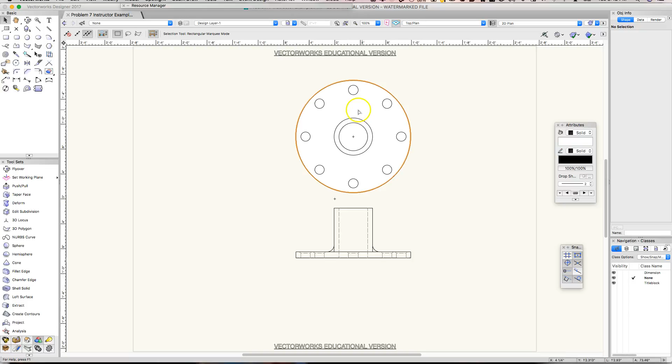You might need to make a couple adjustments, you might need to redraft it. I'll leave that up to you, but right now it is in the proper size. The only thing that's missing is that circle right about here, and all it is, is the 2D representation of the fillet that we're going to put down.

So let's get going. The first thing we need to do is make the base, and that's an inch. So we're going to come over to Model, and we're going to Extrude, and we're going to set that to 1 inch.

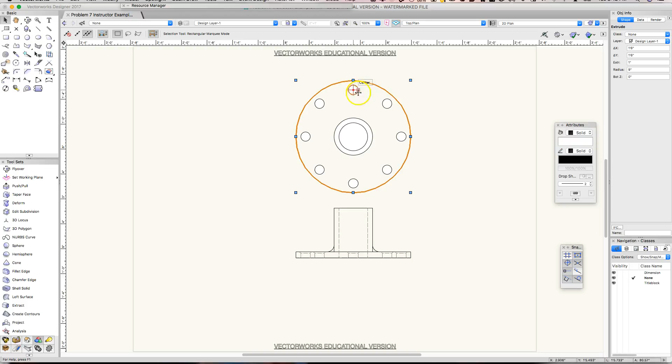The next thing we're going to do is extrude and subtract all of these circles at the same time. So I'm going to select them all, we're going to extrude them, Model Extrude, and now we'll make them 3 inches.

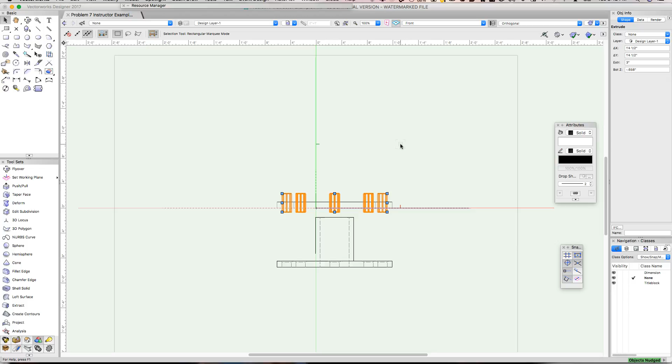Come over to front view, and we just need to scoot them down just a little bit. And then I'm going to hold down my shift key and select the base. We're going to model, subtract solids - we want to subtract them from the red, the base. There's our drill holes, our bolt holes, taken out.

So let's come to isometric. And the one thing we have to do now - let's not worry about these other lines here for now, they're just kind of there, we'll take care of those. But let's look at our drawing.

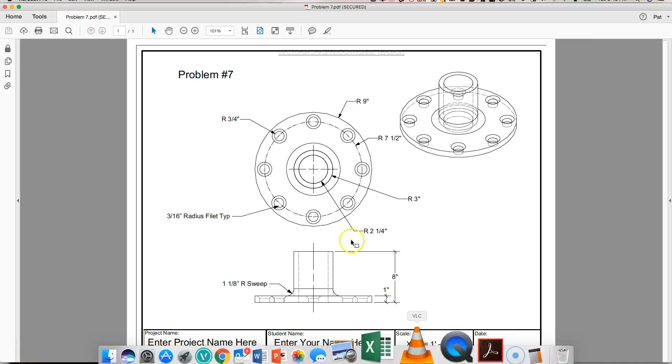Here we need to fix these so a bolt head can fit down, a stove bolt can fit down right in there. And this is wrong - we actually need to chamfer this whole fillet. That's wrong, we're going to chamfer. So let's come back - that's a 3/16 inch radius.

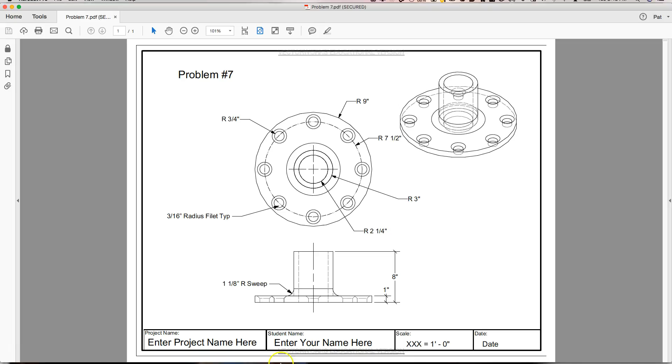Come back to Vectorworks. So what we're going to do is use the 3D modeling tools, and we need to come down and find the chamfer edge. So I'm going to deselect everything, click on chamfer edge, and the one thing we need to do is type in 3/16 of an inch.

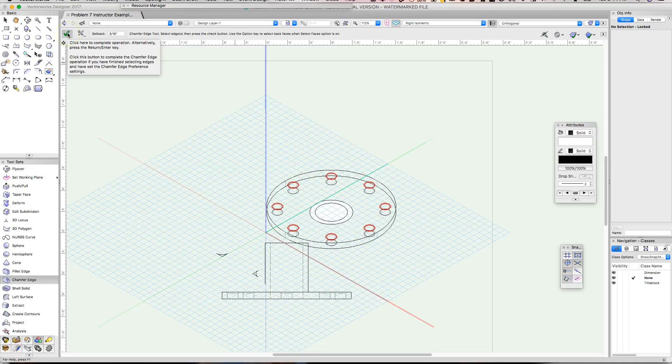Then we need to come along - you notice how it has a red slash on it, so we're going to select all the tops, these top little circles here, holding down the shift key. Then all we have to do is click on the green arrow, and that completes the operation. And look, there we have our chamfered holes ready for attachment to the wall.

So the next thing we need to do is come back to top view, and we need to make this pipe, the pipe that's going to be attached to it. First thing we're going to do is this outer hole, and that is 7 inches. So we're going to extrude that.

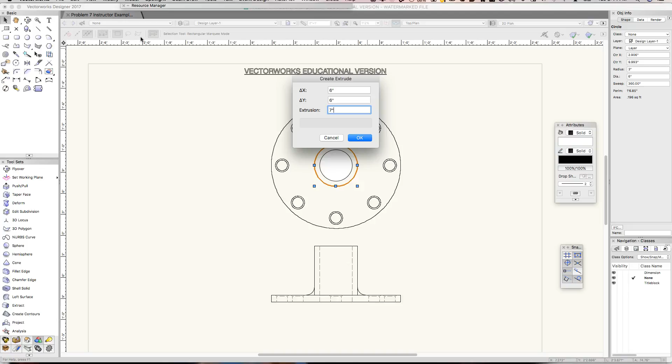7 inches. All right, let's come around and look at it in front view. We're just going to scooch them up just a little bit. I'm going to raise them up and then drop them back down and snap them right to the piece. We're good to go there.

Now we need to take the center out of the pipe. I'll just select it, and we need to cut all the way through, so it needs to be more than 7 inches. So I'm going to extrude it to, say, 10 inches.

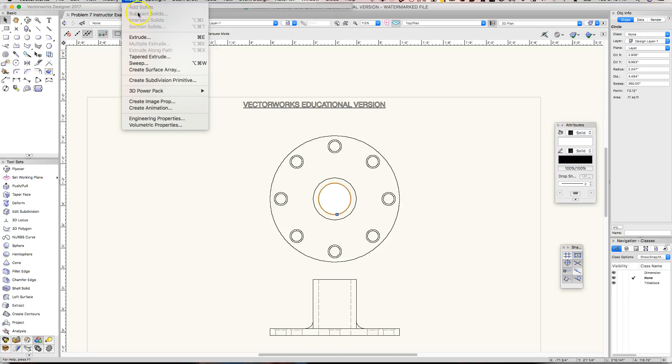Now, what we have to think about here is right now we have 2 separate pieces, the pipe and the base. So what I'm going to do is cut through the pipe and the base, which means we need to have 2 of these 10-inch extrudes.

We could draw another one, but right now there's one extrude, so I'm going to copy it with Control C, and then there's a command really kind of neat called paste in place. I'm going to deselect, come back, and select. Now you can see there's 2 extrudes sitting there.

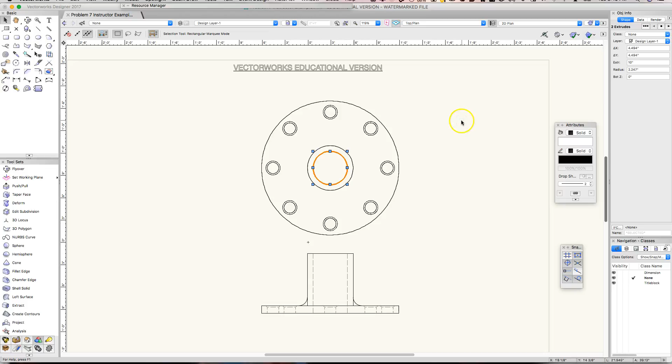Let's come back to front view. First thing I'm going to do is take one of these guys. He's already through this, so I'm going to select him. We're going to model, subtract solids.

And now we need to do the other one, so I just need to scooch it down just a little bit. Select our base, Control Shift click our base, model, and subtract solids.

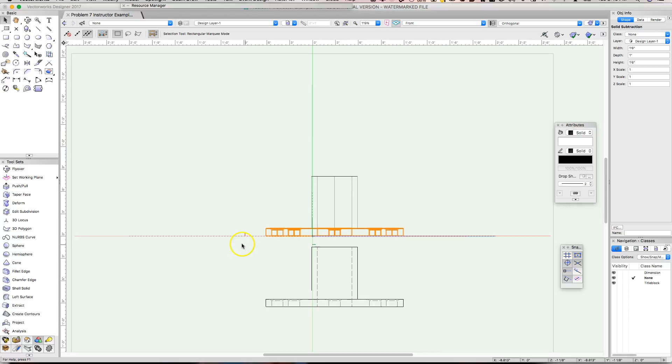So the last thing we have to do, well, now we can get rid of this, get rid of that. And now what we need to do is join, here's a piece, and this is a piece. We need to join these two together.

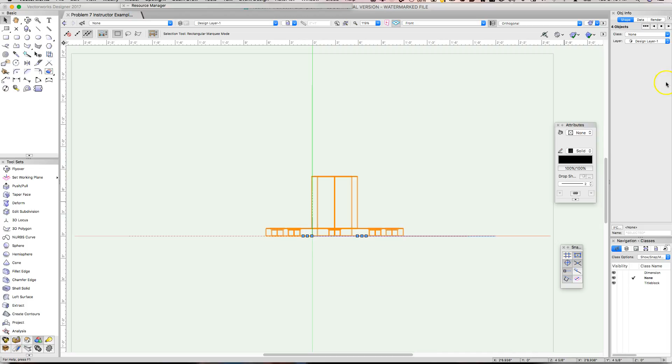So what we're going to do, and I don't think we've done this before, is add our two pieces together. So we're going to select both. Okay, there's 4 objects. Let's look and see what we have here. I think I know, it's these little guys here. We're going to get rid of them.

Okay, we're going to do this. We're going to select these 2 guys. We're just going to come up to Model, Add Solids, and it doesn't really look different, but now it's one piece. It all moves together.

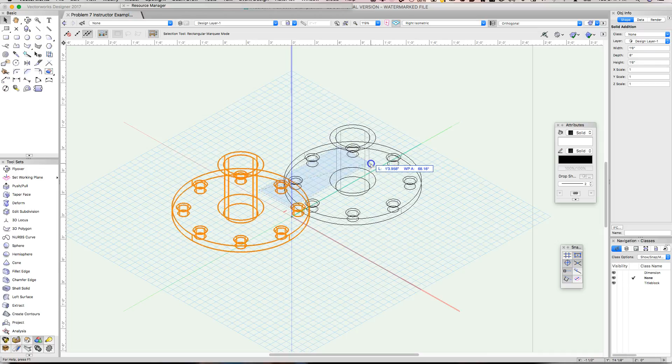So the last thing we're going to do is put that little chamfer, the little fillet, the rounded edge, kind of where the 2 pieces would be welded together if you were manufacturing them. So we're going to come down to fillet, and we want that fillet to be an inch and 1/8.

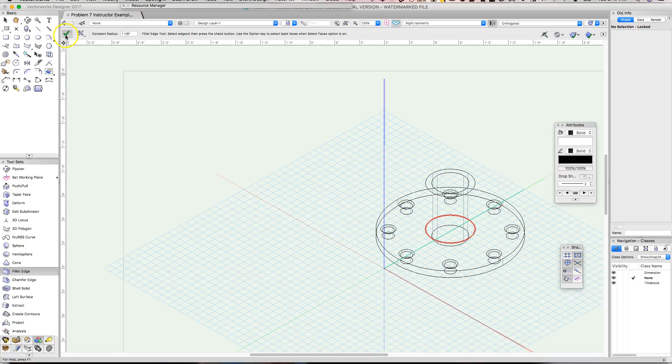So I'm going to come back, 1 1/8 of an inch. I'm going to select my piece here, and here we have it. It put it in. So what I'm going to do is I'm just going to quick render it.

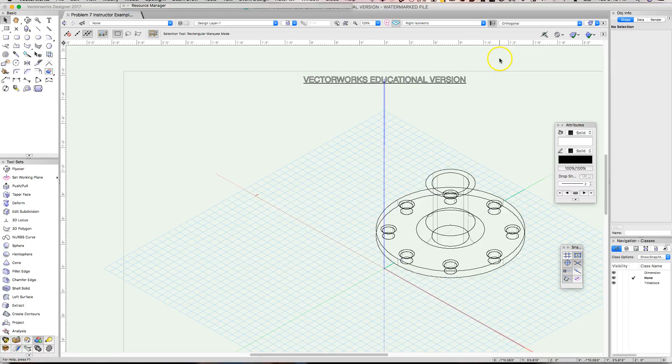I'm going to do OpenGL, and there we have it. There's everything, you can see our nice smooth fillet. Here's our chamfer. We can come and do it in dashed hidden line.

So, but if I'm not mistaken, I'm thinking that this drawing is correct. We're going to save it as we do. But guys, that is problem 7. Not so bad. I will see you all on problem number 8.